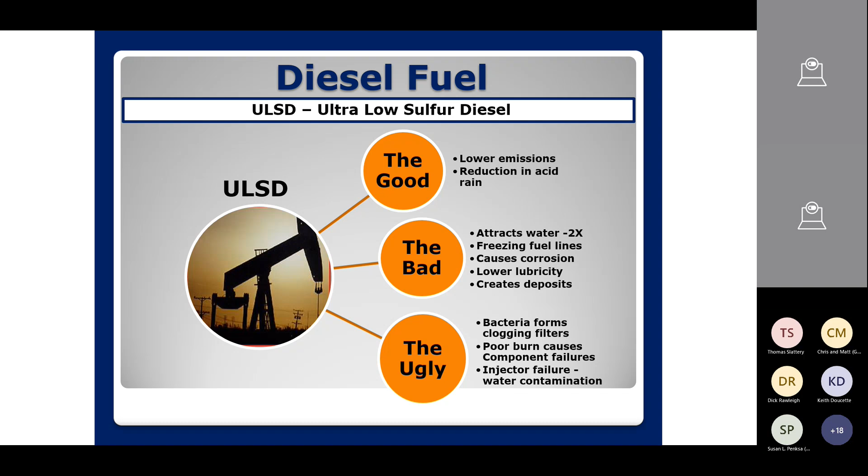So storage is a big deal. If you look at your fuel in the past, like I said, it was okay to leave a half inch of water at the bottom, and maybe you had to deal with some bacteria. But as you store fuel, and with temperature changes—especially as more and more tanks are being installed above ground—we have tremendous swings in temperature during every single day. So a 7-degree change, a rise or fall in temperature, will cause condensation.

That condensation will drip its way into the tank, and that water will fall to the bottom. But if there's standing water at the bottom, that means the dissolved water in the fuel is always at maximum level. If it wasn't, it would drink that water off the bottom. So depending on the temperature, it's always absorbing more or spitting out more to the bottom. Now the problem is when you're filling up from the fuel station or out of your yard tank, you're pumping fuel out of that tank. Well, that liquid leaving the tank has to be replaced by something—there are vent tubes in the tops of all these tanks that allow air to pump in.

So air gets sucked in along with spores, mold spores, bacteria, yard debris. There could be dust in the air, little bits of grains. Moisture certainly gets absorbed, sucked into the tank, and that causes a lot of bacteria to grow. Bacteria actually live on the layer between the water and the fuel, finds its way to water, and that's where it'll grow, and it'll continue to grow.

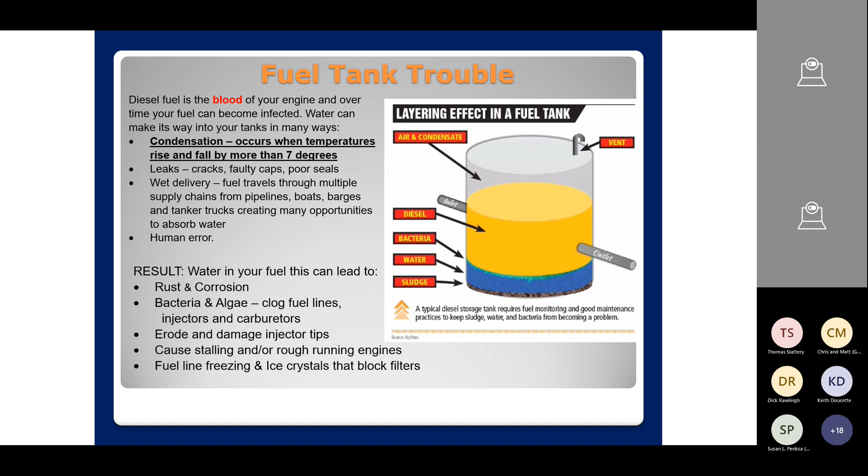And that water in the bottom can cause corrosion in the tank itself. It can cause damage in your engines, but more importantly, it's going to grow this bacteria and sludge in the bottom. So if you look at these storage tanks, at this image, what you're going to see is where the pump is, where you see the pump handle.

At the bottom, there's a little screen, and that sits 6 to 8 inches from the bottom of the tank. The idea is we don't want to suck up any standing water. But whatever's down there, as you start pumping to fill a 100-gallon fuel tank, you're going to swirl that product around, and it's going to suck it up and through. That's why filters are a must.

Now filters on a fuel tank typically are about a 10 micron to 30 micron fuel filter. That used to be okay on older engines, but now newer engines are down to 3 and 4 microns. So we're getting rid of the large debris that might be in this storage tank. And as you'll see on the left, that tall tube is the vent tube, and on the top there's just a little wire screen. That's it.

So every time you pump out of the fuel handle, you're sucking in debris that might be in the outside air. So anybody who has a storage tank that might be in just a gravel lot, we see this a lot with construction companies. Every time those trucks come roaring into that lot, they kick up a lot of dust. If someone's filling at the time, it sucks that dust right in, and we see literally gravel at the bottom of some of these tanks. Those little particles and debris particles can cause major havoc in an engine, and of course the fuel filters are designed to catch those.

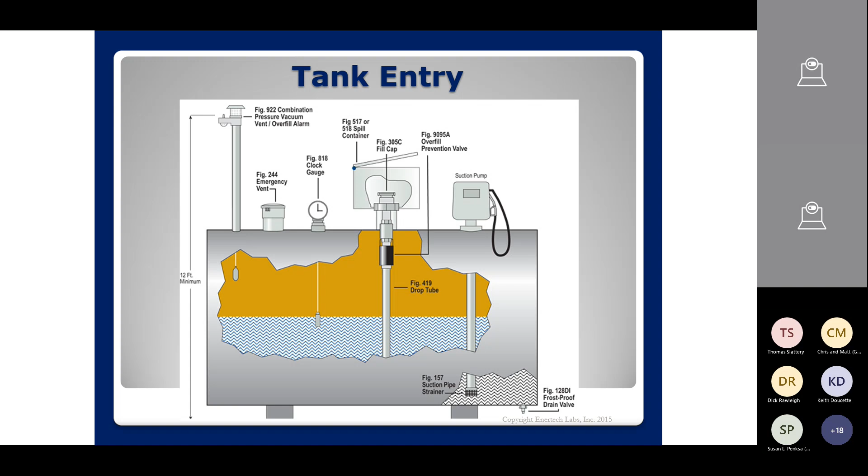It could be a leaky pipe underground. When you go to a gas station, most of the tanks are underground tanks. There's vent tubes that go along the side of the building, they go down underground and into the tank. You can get corrosion in those vent tubes and leakage into those tanks. We fix many of those. I work with a lot of companies that repair those tanks, and we break the water down to prevent damage from happening and save the fuel and restore it to good operating fuel.

So again, water's our enemy. Icing's an issue, corrosion is an issue. If there's standing water present, bacteria can grow. Without water, bacteria, their cells are filled with water. If you dry that fuel out, that bacteria will die. So it's always lurking there in the background, waiting to grow.

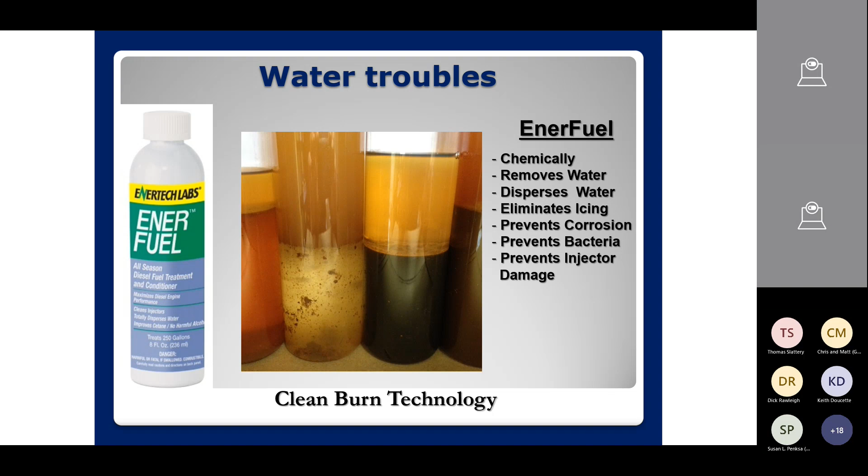All right, so that's something you really want to avoid, because those mold spores can actually get into each of your vehicles if you're filling, and they can only really be killed by a biocide or drying the fuel out, just extremely drying the fuel out.

So water's a problem. Bosch actually said that their injectors are designed to go 1 million miles, but they're only lasting 250,000. And they said dissolved water is a major, major problem. At high pressure, it's causing microscopic damage to the injectors, to the needles, to the tips. Corrosion along the valve bodies or along the inside of the injectors is a major problem.

The paragraph down there that says, it's right out of the brochure here, says the majority of engine problems stem from contaminated fuel. Corrosion problems, it's hard to read on this small screen, corrosion problems are from water contamination in the fuel caused by improper storage. And this corrosion is what's causing major problems.

So their solution was to put a $1,500 desiccant system on the intake of the vent tube that you saw in the tank, which is a great idea. The problem is that fuel comes out of the pipeline, gets stored, gets transported, stored again, finally makes it to your tank. It can already be contaminated with moisture. So we chemically break that water down to prevent the damage from happening.

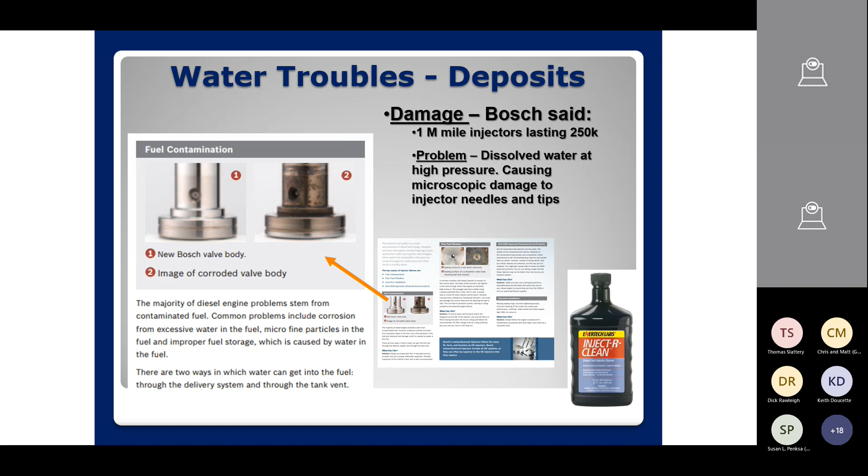And this is what we can do. We can actually take a severely contaminated fuel, treat it, and draw it back to clear and bright. And actually, in that state, no corrosion. We won't freeze anymore. It will prevent a lot of bad problems that can happen.

Let me see if I can start this video. Linda, I might not be able to actually run a video. Oh, that's a terrible thing. That's okay, I can go ahead and run that. Oh, you can? Okay. I'm muting the audio and then... Okay, there you go, it's running. All right, it's not on my end.

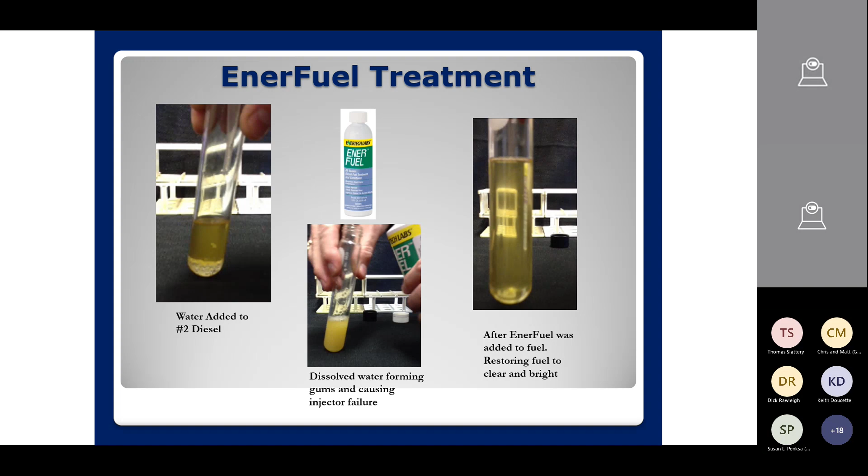But anyway, this video, what we're trying to show here is basically a video of the prior screen, which is showing that we can chemically break water down with the addition of our base product, called Enerfuel for diesel, and GasRx for gasoline. And we can return that back to clear and bright, and it's a permanent chemical change. What it does is actually create a bond between water and fuel, molecule by molecule. It's called dispersion. So fuel is hydrogen and carbon, water's hydrogen and oxygen, and it binds those hydrogen atoms together, and it allows, in this particular case with gasoline, the ethanol to stay blended in the fuel.

And with diesel, it allows that water to stay dissolved into that fuel chemically. It's small enough, chemically bound molecule by molecule, so it's not large enough to cause any damage to injectors. And, oh, is this going to work now?

Oh, it is going to work. Okay, I don't know if everyone can see this, but it's finally working here. So a few drops of water, this happens to be ethanol gasoline.

And with a shake, what you're going to see is it turns into a lemonade-looking gasoline. So what we're doing is we're bringing that gasoline to its maximum dissolved water content. And now that water will actually start to fall to the bottom. But before that happens, you'll see oils that form on this container, and that will harden. Those oils will become a gum, harden into a varnish, and cause major problems. With the addition of GasRx, you're going to see that this fuel turns back to clear and bright instantly.

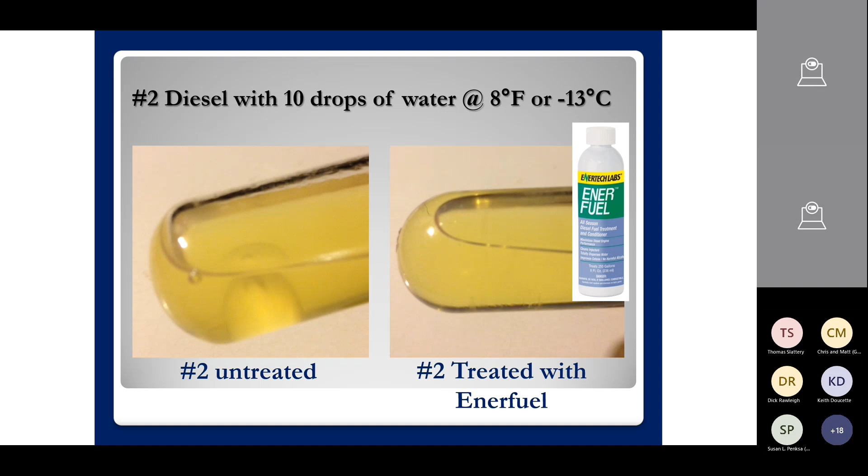So biodiesel, here's another mix. We're talking about diesel fuel that's made out of petroleum. That's basically taking a barrel of crude, boiling it down. You get 180 different chemicals out of a barrel of crude, and the mid-level distillate is going to be diesel fuel. If you keep that distillation happening more and more, you'll end up with gasoline.

Vapors come off actually before the diesel fuel. Then you end up with thicker lube oils and eventually asphalt and road tar that we make roads out of. They take that really thick stuff and crack it and reblend. They try to liquefy some of that thicker stuff and create more diesel fuel. So you'll have asphalt droplets in the fuel, and that's important to talk about because you'll end up with another contamination down the road with these high temperature, high pressure engines.

Along with all the troubles that happen with diesel fuel, biodiesel is a problem. Biodiesel is an issue because we're blending that in at 3 to 5% in most cases year round. And then even in the summertime, we get up as high as 10 and 11%. In Illinois, it's mandated to be 11%. There's a little less BTUs in that fuel, so over-the-road guys that fill up in Illinois will lose about half a mile per gallon on a 7 or 8 mile per gallon vehicle.

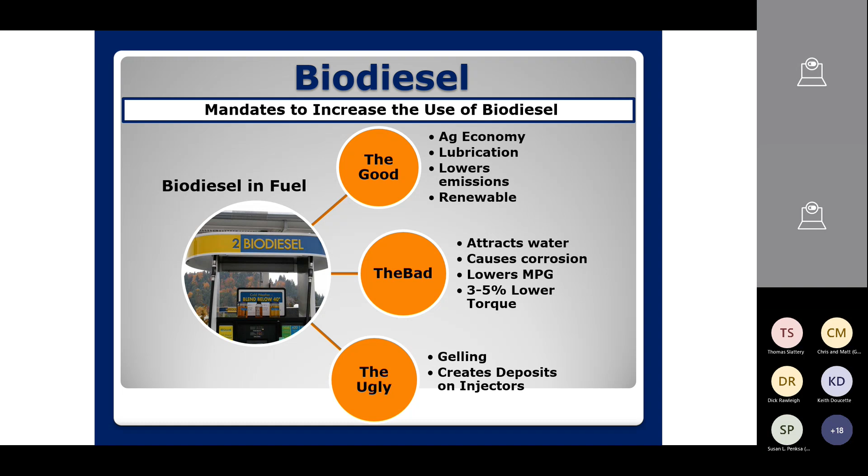Certain people like biodiesel, others don't. When you're out there in the world of plowing snow in the wintertime, it can be a nightmare for you. If the temperature drops and you have some biodiesel, it can cause some major problems. I've seen chicken fat, beef tallow, pork fat - those are the worst. Getting into different types of soy and different types of biodiesel, it can really be passed through without much of a problem. The soybean oils are some of the best.

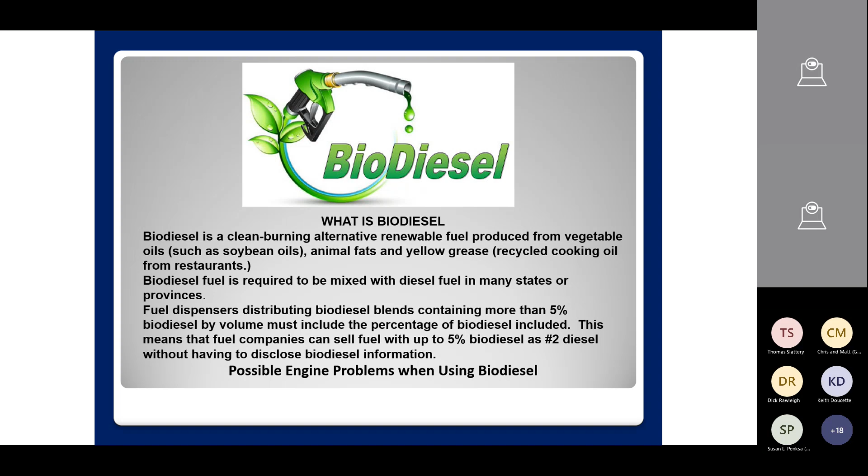Engine problems can form when using biodiesel - something called metal carboxylates or carboxylic acids. Some of the storage situations that the fuel is in, combination with those fatty acid methyl esters or monoacids, can cause a sort of oxidation layer or corrosion. It can corrode iron surfaces. It can also cause a carboxylic salt layer.

So what that means for you and your engines is that this layer can build up on the inside of the injectors and in the fuel systems and restrict fuel flow. It can also cause a sticking point for the injectors. So some of these needles can stick, preventing the engine from running properly, causing some problems with runnability, starting, hard starting, rough running - major problems with those engines.

So it's important to know that these things can be avoided by using the right injector cleaners, by watching to make sure, if at all possible, not to use biodiesel in your fuel systems, or make sure you know that you need to do something to prevent further issues.

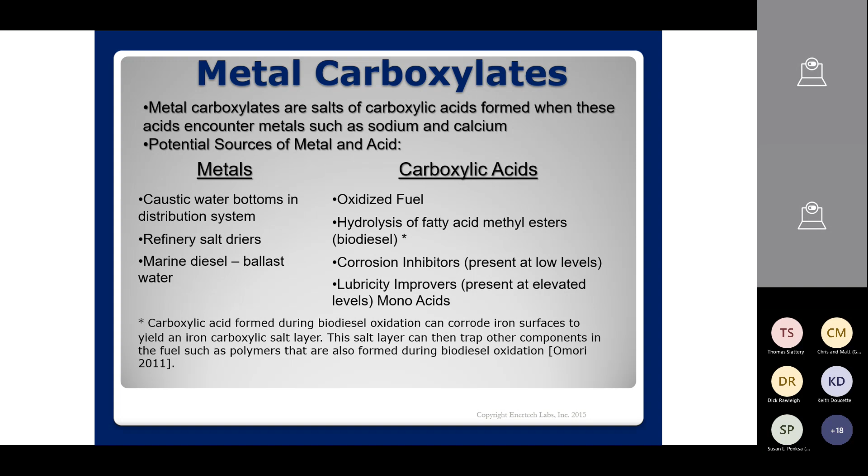If you picture fuel as a basketball-sized drop, the outside layer starts burning, it has to burn toward the middle - that takes a period of time. If you had that basketball-sized droplet of fuel at very high pressure, maybe it turns into 100 marbles. Well, that same volume of fuel now has a lot more surface area, and a smaller time is needed to burn that fuel completely. That allows for a cleaner burning engine.

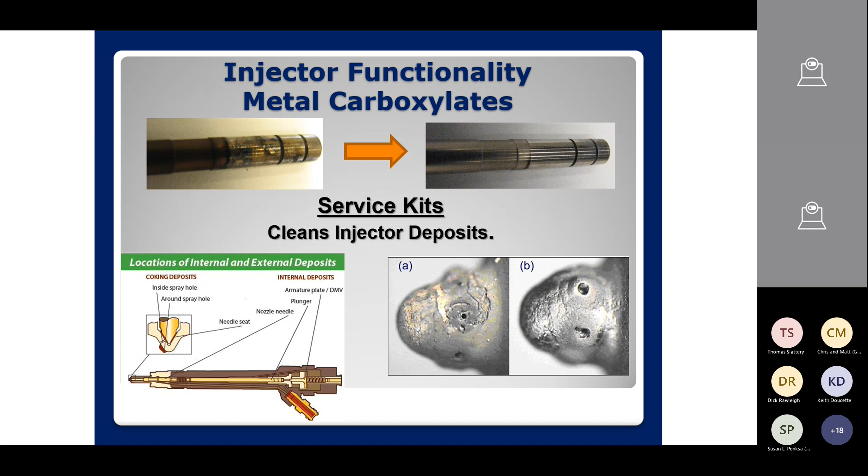Any unburned fuel is the black soot that you see coming out of the exhaust of an old truck. Well, you don't see that soot anymore. That soot's still there - it's just getting caught in the diesel particulate filter, the DPF.

So you'll see here, this is another injector. This is a HEUI style injector from a 6-liter diesel. You'll see that red fuel flows through the inside and around the needle at the bottom and out the tip. What it does is the injection happens from high pressure engine oil.

It hits that plunger and pushes fuel out at 21,000 psi. It actually overcomes the pressure of the spring that's holding that needle all the way down to seal that tip. In that image to your right, you'll see the needle is actually seated right in that tip down there. So as the pressure builds up, it pushes that needle up, allowing fuel to squirt out of the nozzle holes. And those holes are very, very small.

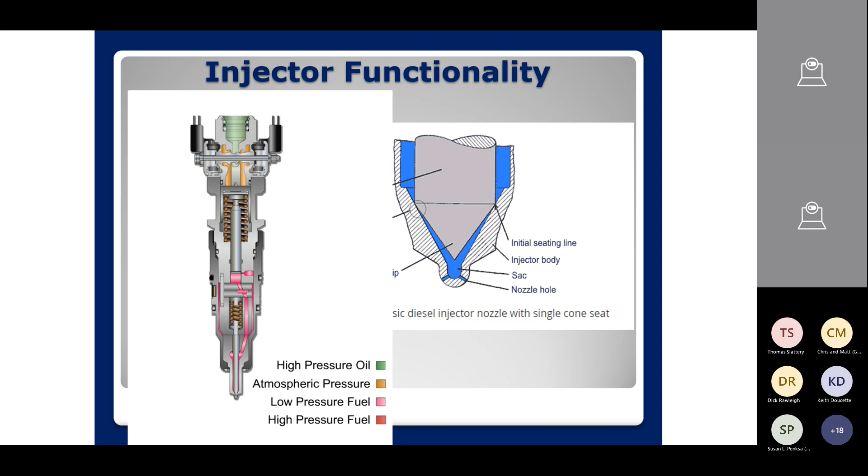So any debris that gets into that situation can really cause some damage. Now picture that at 20 to 30, 35,000 psi. If a droplet of water gets in there, the droplet of water is larger than fuel droplets. It doesn't fit through that little nozzle hole too easily, and it can start to distort that tip, bend or blow that tip. So water is our enemy. No matter if you believe in our hocus pocus or the fuel additives that we sell, please understand, no water is allowed in a fuel system anymore. It's dangerous and damaging to these engines and shortens their life dramatically.

Now think about what happens. What we used to do, like in the previous slide, is take low pressure fuel and hammer it really hard to increase pressure to get it to inject. So right at the tip, we had just 40 pounds of fuel pressure, and then we compressed it very rapidly in a short period of time to get up to that high 20,000 psi.

In newer engines right now, piezoelectric injectors, instead of using a mechanical hammer to inject that fuel once, we're using high pressure fuel, and we're actually able to buzz fuel in, literally a number of times per piston stroke. But what engine manufacturers had to do is have that high pressure fuel available.

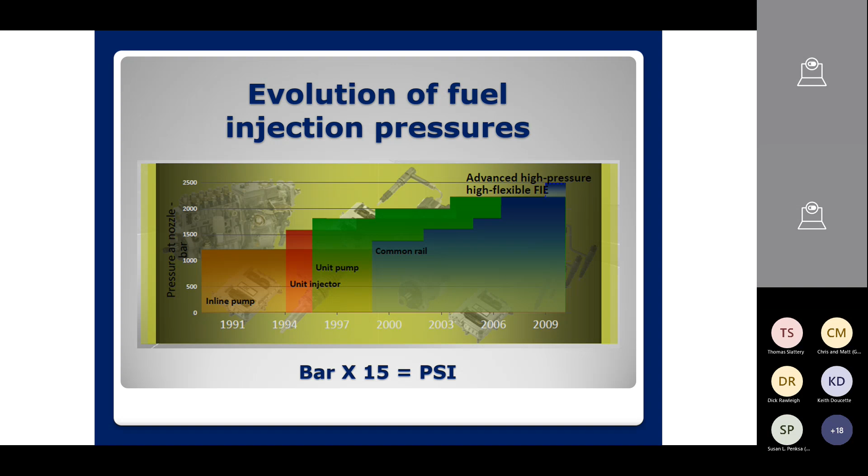So now in these systems we actually have fuel rails that are at that 30 or 40,000 psi. In order to get it pumped up that high, you may take fuel from the tank and go through a number of pump and compression stages to get it up to the fuel rail, the common rail. That common rail is sitting at very high temperatures and very high pressures. By the time it gets injected out of the tip, you can have up to 300 to 600 Fahrenheit. It's a tremendous temperature, and at that tremendous temperature, you can actually cook the fuel.

Now, remember earlier I said fuel is hydrogen and carbon. We can cook that fuel and create something called carbonaceous deposits, where that fuel can actually start to break apart the hydrogen and carbon atoms. That can also cause polymerization of anything in that fuel that might be like asphaltenes. There's little asphalt molecules that are in there, microscopic, in all fuel, used as energy, and they burn. But with high temperatures, they start to get sticky. They polymerize and start to stick to each other.

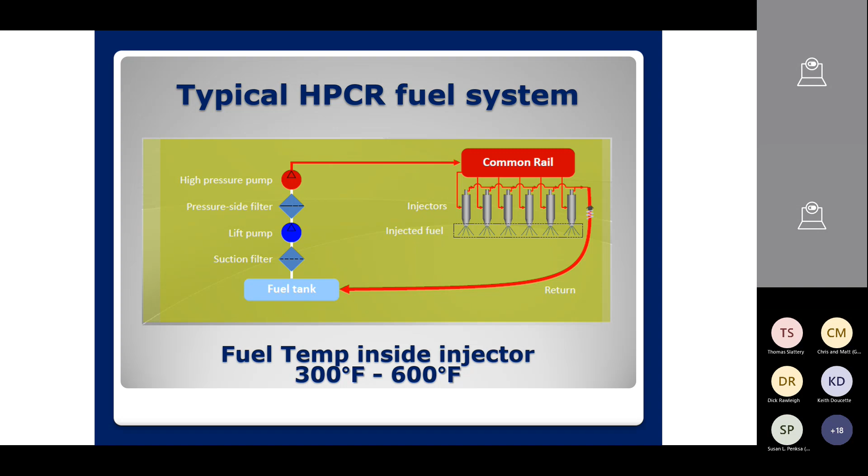You can start clogging those fuel filters and actually make it look black, like an oil filter. You might not even be able to get on some engines back to the normal fuel filter changes. If you have a Davco filter, a glass bowl filter on a semi, you'll actually see the fuel levels rise and those filters look black. And if you look at the fuel, it might look good and yellow, might look like decent diesel fuel, and you wonder, where's the black coming from? Well, it's these microscopic carbon deposits that are happening.

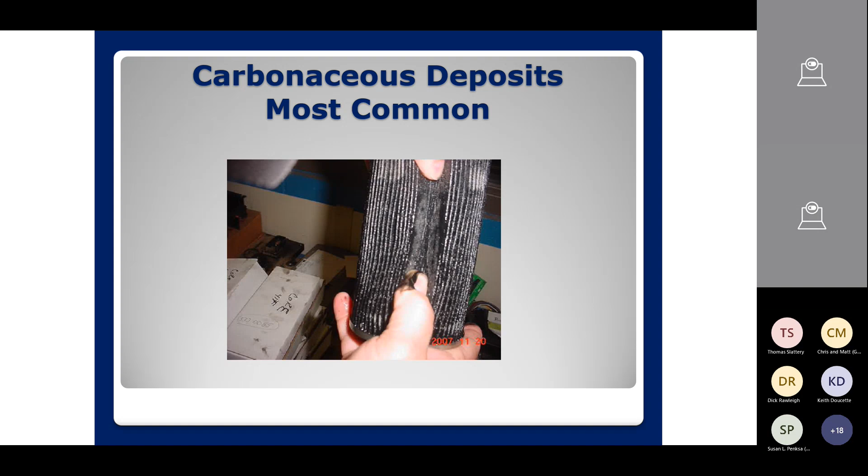In this situation, you might rub your finger on and get some of that black stuff like you see in this diagram, and it might feel kind of gritty or hard. That's carbonaceous deposits from high temperature. You need thermal stabilizers to keep the polymerization from happening, and injector cleaners to keep it from happening as well. If it feels oily or slippery or slimy, it might be asphaltene dropout. And think about that.

That's like a heavy oil, like an asphalt or lube oil, and that's also another thing that has to be thermally stabilized. Remember, all these little problems you see in an engine - rough running, hard starting, deposits in injectors, water contamination, corrosion, bacteria problems, carbonaceous deposits, asphaltene dropout - all of this is happening on the base stock of your fuel.

You don't know where that fuel's coming from. You don't know if it's got biodiesel in it, how much asphalt it has from the refinery, where that raw material came from - sweet crude from overseas, sweet crude from the Bakken Formation in Montana. Sometimes we're getting crude out of the middle part of the U.S., which happens to be decent crude, depending on the cost of a barrel.

When it gets up to $120, $130, $140 a barrel, we're getting product out of the tar sands up in Canada that gets sent down to our refineries. That's a very difficult thing to refine. The higher the paraffin wax content, the higher the gelling that happens.

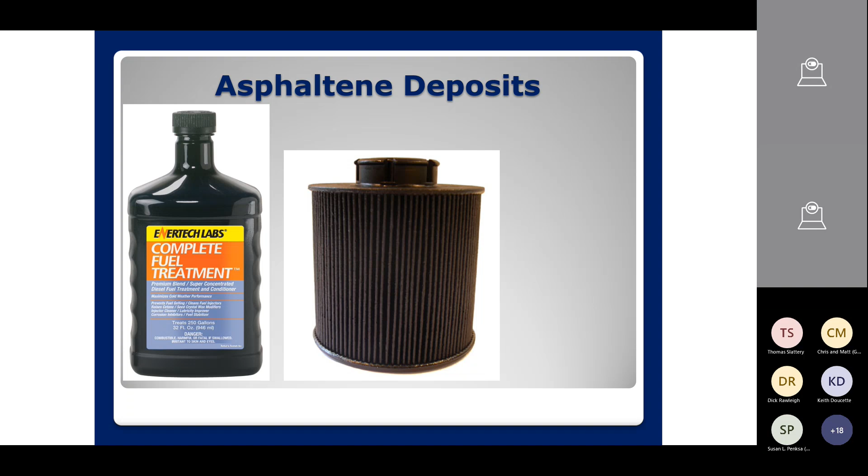There's a lot that goes into fuel. People just think, well, it's fuel, diesel fuel's diesel fuel, what am I worried about, I don't have to worry about anything. It's not true. Depending on the quality of that fuel - we haven't even talked about the basics of fuel.

Which is how much lubricant is in there. There's lubricity that's needed, and as we've refined out the sulfur, a side effect of refining to ultra low sulfur diesel fuel is removing lubricity. How much cetane's in that crude? Cetane's a measure of the combustion of that fuel.

What about the injector cleaners? What about water concentration from the refinery? What about the amount of paraffin wax? We're going to still talk about that kind of stuff. But how this fuel all comes together as a composition depends on how it acts up in your engine, on how well it burns.

And it used to not be a big deal - a diesel engine could burn anything. The older engines at very low injection pressures, you could pour anything you want into it. You want to clean out your injectors, toss a little tranny fluid in there. Not anymore - you'll damage your engine.

People used to put used engine oil in to lubricate. You can't do that. Maybe if it's a 50-year-old tractor, but not on a new engine.

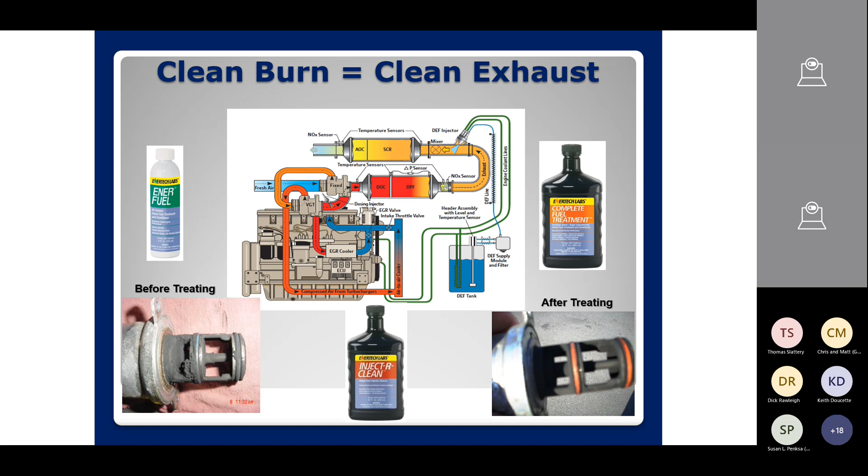We have customers that treat with our products that don't have these nightmare problems because we get the fuel, we remove the water, we have injector cleaners, lubricity agents, cetane improvers, and products that help the fuel to burn more efficiently. These coking problems - anything - when you run a diesel engine, if it's an idling engine, it's a cold running engine. If you run that engine hot, it wants to be run hot, run hard.

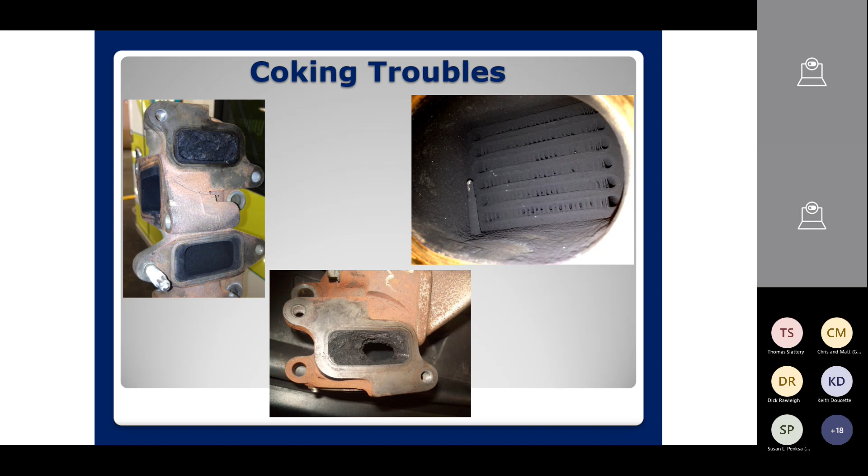Just cruising down a highway is not running that engine hard. If you're hauling heavy, fine, if not, shut that motor off. If it's idling, it's going to clog these components horribly.

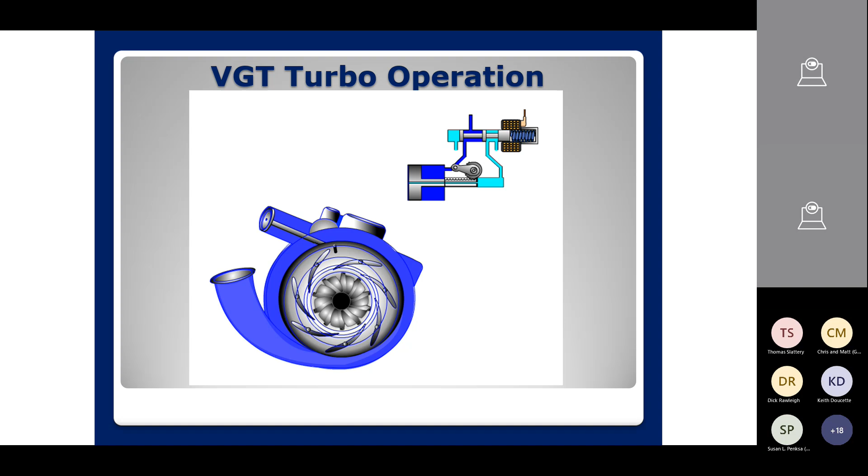VGT turbos - you'll see these little fins in there. They open and close to change the amount of air pressure needed to keep that engine running properly. These things get clogged horribly, and it locks these blades up and doesn't allow them to move back and forth. We have injector cleaners in our product that, when the fuel burns, turns into a hot vapor that will help to liquefy and clean out some of these issues.

Sometimes they're too far gone with corrosion, rust, and deposits that are hard as a rock. But the deposits are literally in the exhaust, unburned fuel. See, when the piston stroke runs and you fire, that fuel squirts in, that compression engine burns. Any moisture that's in that fuel will turn to steamy vapor.

When it goes through an EGR cooler, it drops 600 to 700 to 800 degrees. When it drops, that water vapor will start to get sticky again. It will mix with that unburned fuel and cause a sticky mess that starts to line the inside of these components, sticking to all the EGR coolers, EGR valves, intake manifolds, and VGT turbos.

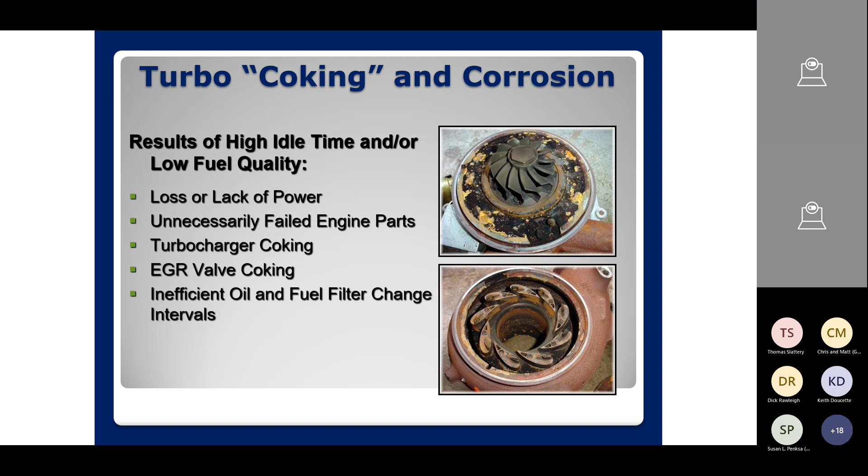The DPF collects all the soot. This is like having, I describe it as, a wire garbage can next to your desk. You can fill it with globs of wrinkled up paper, but you clog it with paper, and if you try to blow air through that wire mesh, it's going to be restricted by the paper. Well, that's what happens in these traps. It fills with unburned fuel. Now we got to burn the fuel to get rid of the soot or get rid of the blockage. Same thing with the paper. If you light it on fire, you'll end up with a quarter inch of ash at the bottom, and you can fill it with paper again. Well, that's what happens in an active regen.

We squirt fuel down the exhaust line, wasting fuel economy to flame throw this diesel oxidation catalyst at 400 to 600 degrees going in, turns into 1400 degrees coming out, and burns off all that soot, freeing that trap to get more soot to add in.

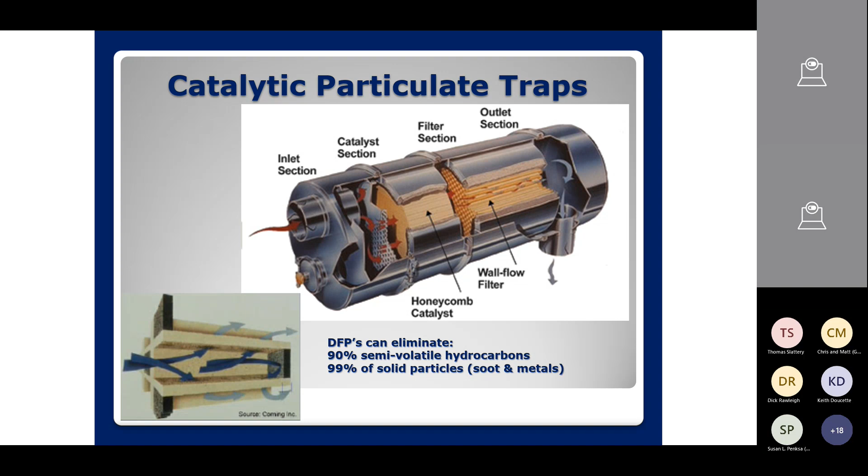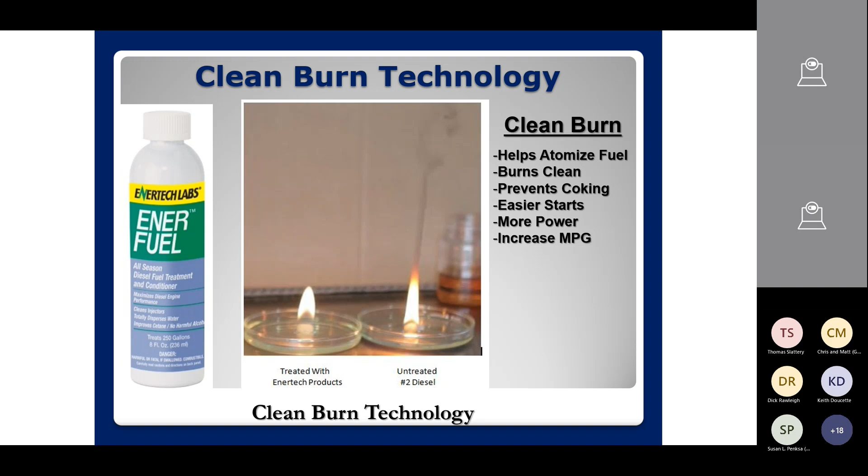We think you should reduce that by getting the fuel to burn more efficiently. So we do that. We actually change the fuel composition a little bit with surfactants and allow the fuel to atomize chemically as well as mechanically, and allow that fuel to burn more efficiently.

Melinda, if you could fire up this video, I'd appreciate it. So I think what's happening with the videos is that if people play them independently they work, but they're not broadcasting. That's the feedback I got from somebody else on the call. We did something earlier where you got it to play, and then I could press the play button and it would work. Because right now it's not working for me on my end. Okay, so try to play it on your end. Maybe it'll trigger something. It is playing on my end.

Okay, well if everybody could try playing this video, I just know the timing, it's about a minute. Basically, each of these dishes has diesel fuel, the same diesel fuel in it. We use a cotton ball as a wick. The first dish we use Power Service. The second dish we pour in a little bit of Lucas Oil. The third dish is our base product called Enerfuel. And the fourth dish is just the straight number 2 diesel. What you'll see is everything has soot coming off of it except the one that added Enerfuel.

You'll see blue is a high temperature flame and orange is a low temperature flame. So we have a blue hot flame. We're helping that fuel to burn more efficiently. We're helping you to squeeze all the horsepower you can out of that fuel, all the BTUs, get the most power out of your engine and not clog those components. So it helps atomize the fuel, burns clean, gives you more power, prevents coking and clogging, easier starts, better fuel economy, more horsepower.

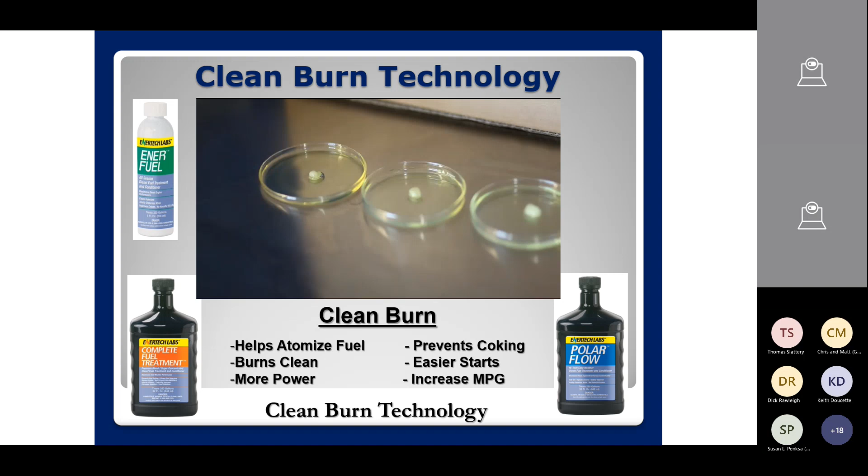Oh, there we go. All right, so this injector that you'll see—real quick, we have products. This is an oil-fired or HEUI style injector, hydraulically actuated injector. They use dirty engine oil to fire the injector. Well, that can create its own deposits. So we have an oil flush that's detergent based, not solvent based, that really helps to clean that side of the engine out and keep that injector firing the way it should.

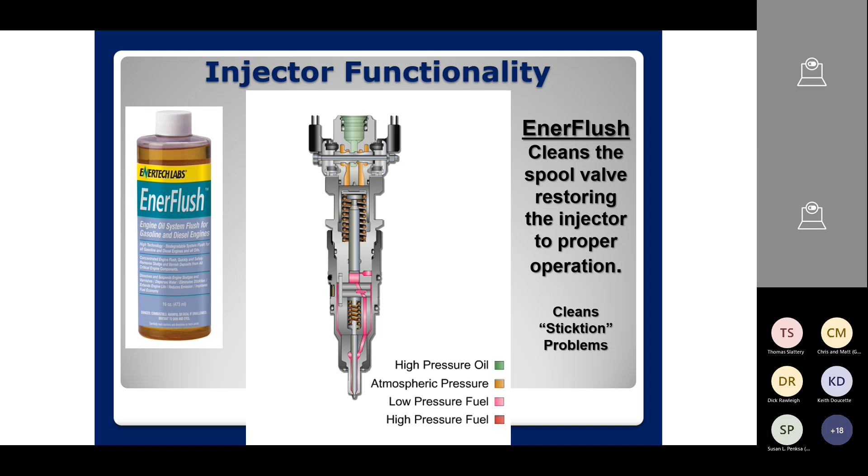All right. Now, what everybody's used to hearing when it comes to diesel is cold weather. All of the things we've discussed so far have nothing to do with how cold it is outside. Now, except for ice, I guess. Now we have paraffin wax that thickens in the fuel. That paraffin wax is just candle wax. It's literally can become hardened candle wax.

That liquefied microscopic wax crystals that are in there burn and create tremendous horsepower and BTUs. That's why we use diesel to haul super heavy things and not gasoline. Gasoline doesn't have any of that paraffin wax in it. So now what happens to paraffin wax when it gets cold? Those wax crystals start to form and grow and stick to each other, and they start to get big enough so you could see them in the fuel like a hazy wave through the fuel. Your fuel will start to look a little cloudy. So that's the cloud point. It'll still pass through your filters.

It'll still run your engine. You don't have any problems. But that cloud point is an indicator that just a few more degrees colder and a little more time spent, you're going to hit a problem called the cold filter plug point. And that's exactly the number that if you buy your own fuel from fuel suppliers, you should ask them, what's my cold filter plug point today?

Right now, I just got a sample of fuel coming out of a fuel station in Buffalo, and that sample was sent this week. The cold filter plug point of that base fuel was 0 degrees. Now, June or July, it's plus 5 to plus 10. The last time I did that in June, it was plus 8 degrees. So coming out of the rack, which means coming out of the pipeline, it's at 0 from the refinery today.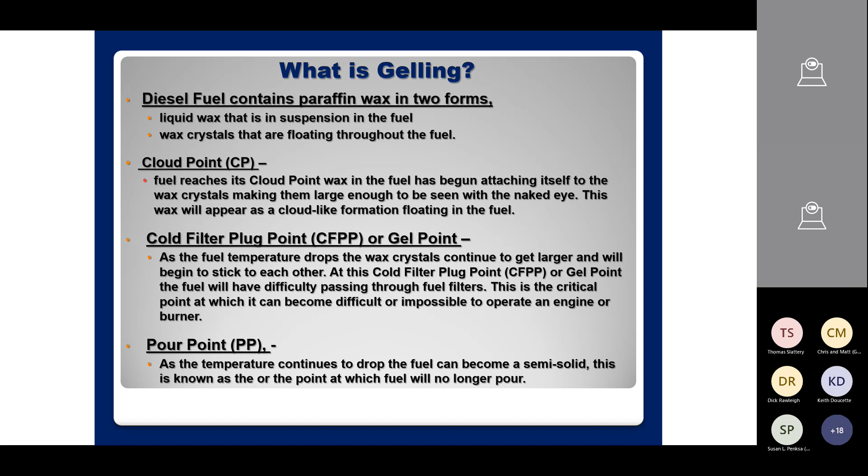Pour point is where, and the only people concerned about pour point are the fuel delivery company. You can't pour it out of a container, you can't pump it through a hose. You guys don't really care about that stuff. What you care about is cold filter plug point. What is that number? That's basically what we use cold flow improvers for.

So in an additive, if you ask your fuel supplier, how are you treating my winter blend? Everybody calls it a winter blend, and you're paying more per gallon for a winter blend. Well, what is it? Is it a cold flow improver, or are you selling me kerosene? Cold flow improvers coat the outside of these microscopic wax crystals.

And even as you look at how we've refined this fuel, low sulfur fuel had little tiny jagged crystals that don't look like they'd really stack or stick together. Ultra low sulfur, microscopically, look at that - they look like building blocks with nice flat edges that can really stick together nicely and create a big problem called wax dropout, which is when they stick together, fall to the bottom, and jam filters. So this is a problem for ultra low sulfur diesel fuel.

So what happens with cold flow improvers is they coat the outside of those wax crystals before they start sticking together. It is a preventative. So if you're already gelled up, it doesn't matter how much additive you add as a preventative, as a cold flow improver - all you're doing is taking that one big giant wax crystal and coating it so it doesn't stick to another giant wax crystal.

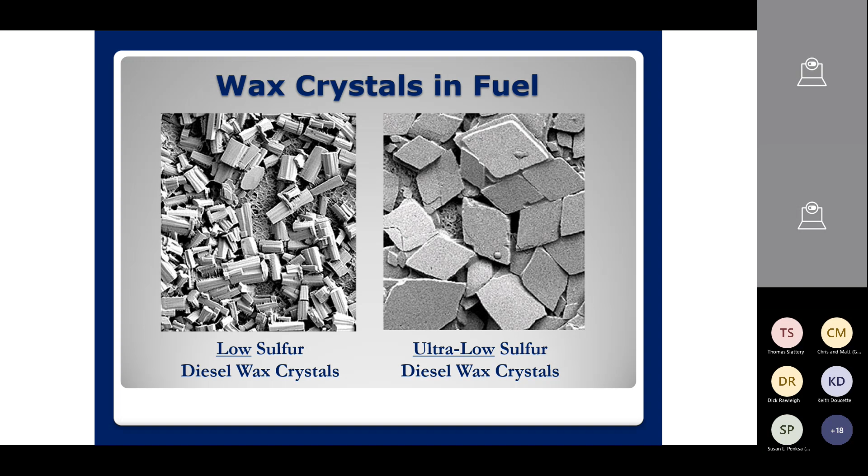If it's gelled up, you have a big ball of goo at the bottom, you're just going to coat that one big ball of goo. You need solvents to liquefy this. Solvents will liquefy these wax crystals, allow them to blend back up into the fuel again and burn. That's the way, or you bring it into a very warm area and allow it to sit for a period of time for those wax crystals to melt again.

The other thing we do is blend with kerosene. Kerosene is just diesel fuel without the paraffin wax in it. So you lose fuel economy dramatically - you'll lose a tremendous amount of fuel economy using straight kero. In the refining process, they remove a lot of the lubricity and a lot of the cetane. So this is a problem. Instead, you pay about 20 cents more a gallon for it.

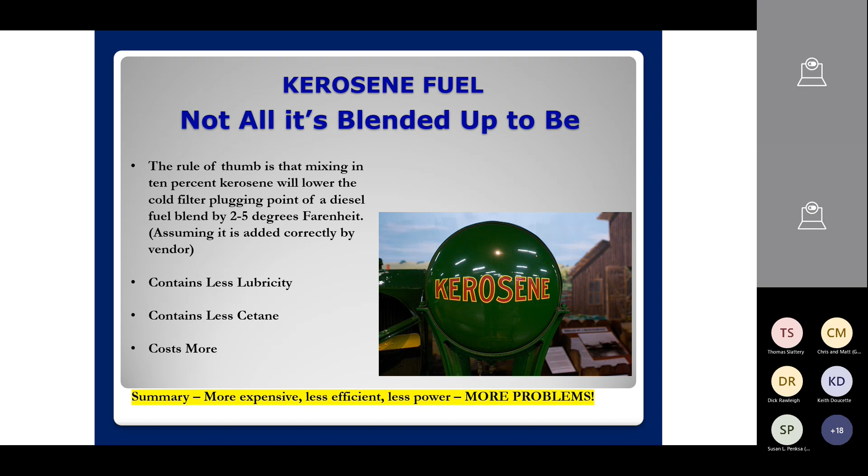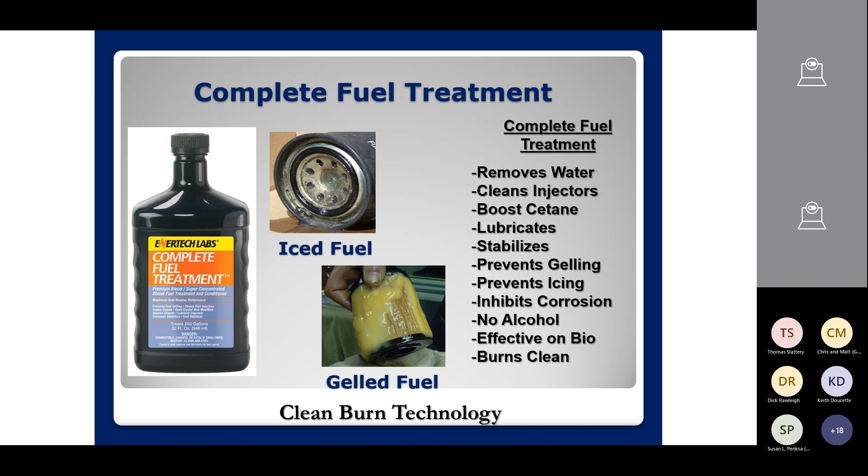So we would recommend that you treat with a fuel additive to coat the wax crystals, to boost cetane, to boost lubricity, to boost cleanliness, and get the fuel to burn more efficiently. And we can do that at 3 to 4 cents a treated gallon.

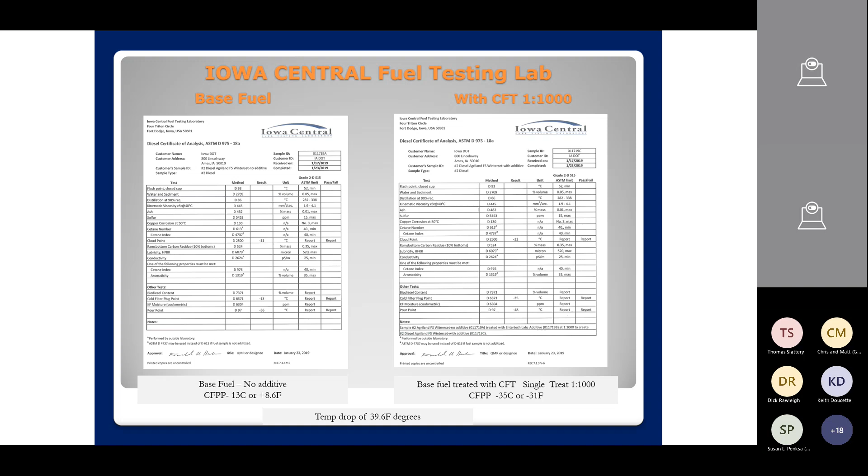This was a base fuel treated last year in Iowa. The base fuel gelled at plus 8.6 degrees, and with one treatment, a complete fuel treatment, a gallon per 1,000, it dropped 39.6 degrees to minus 31 Fahrenheit of protection. We haven't been at minus 31 in Buffalo ever. So that's a big deal.

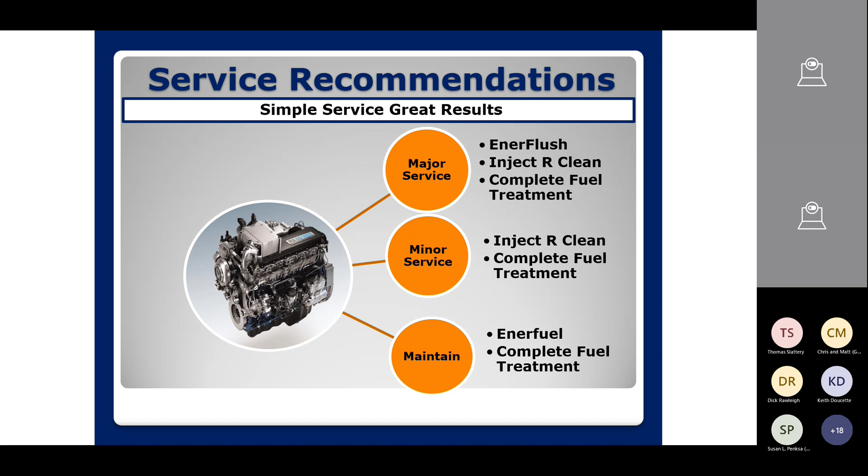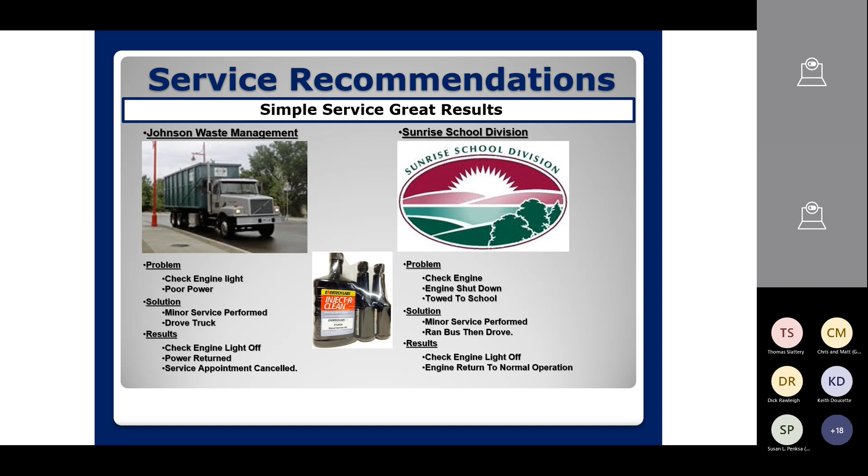We increase fuel economy. We have testimonials enough to pay for the fuel products, the fuel additives. We have service kits that allow us to - I'm skipping along a little bit - the service kits are great. If you think you need injectors, get one of these very inexpensive service kits. You're filling the fuel filter housing with injector cleaner, run the motor outside for about 40 minutes at a high idle. It'll clean those injectors and light them up. If not, then replace injectors.

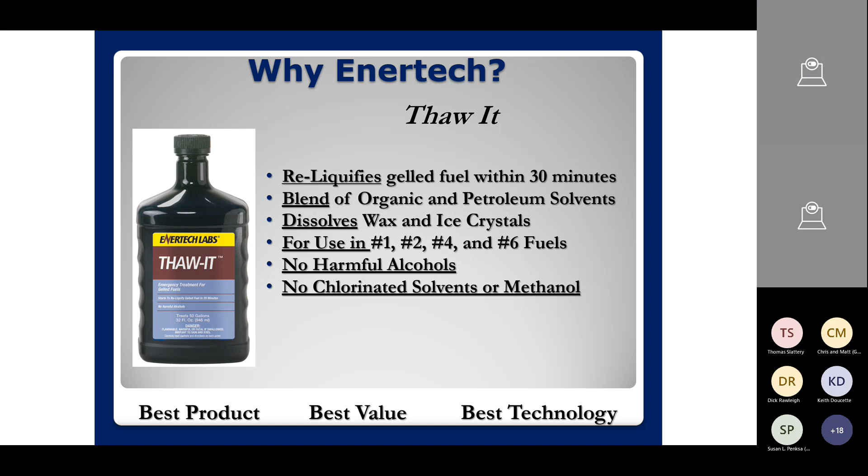Thaw It is a product that will liquefy the diesel fuel and get you back up and running. So that's the diesel. We do not affect SCR systems, which break down NOx. We could go into that in a separate seminar if you need to.

So that's diesel. We recommend that you treat your diesel, take care of it, watch your fuel tanks, make sure you treat your engines properly, and they'll treat you properly for years and years and years. We have fleets that treat with our products and never pulled a DPF off ever. In 200,000 miles, 12-year-old school buses never have a problem.

On a quick note, we only have a few minutes left. I'm going to jump into gasoline. Gasoline used to have something in it called MTBE, methyl tertiary butyl ether. That product, when you burn it, releases oxygen into the exhaust line. Well, that causes cancer in humans and causes a lot of problems for us.

So in comes ethanol. Ethanol's been around as a fuel for a long time. It's basically corn, it's liquor, right? We refine this and make this ethanol, and we mix it into our gasoline at 10% because burning it at 10% releases oxygen for the O2 sensors to tell the fuel control module how much fuel to inject. So on EFI'd engines, this is a real benefit, but of course it absorbs a tremendous amount of water.

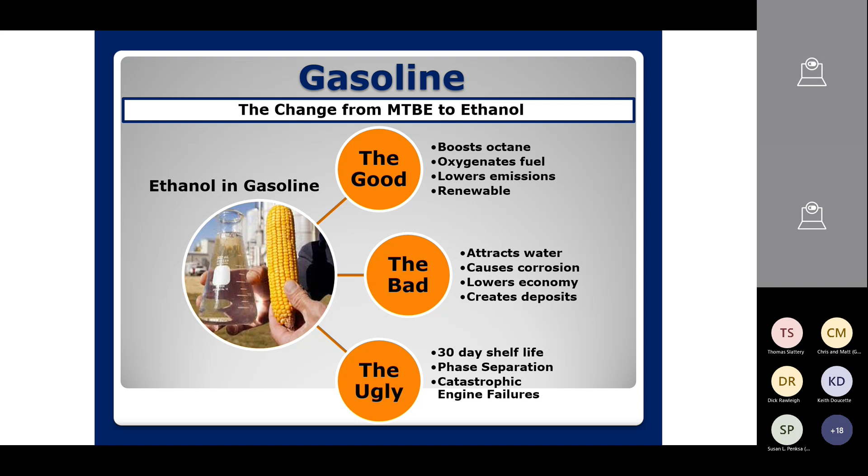Alcohols love water. It'll hold 5 gallons per 1,000, which causes horrible problems with corrosion. That corrosion can cause deposits, oil contamination. It can get to a problem called phase separation.

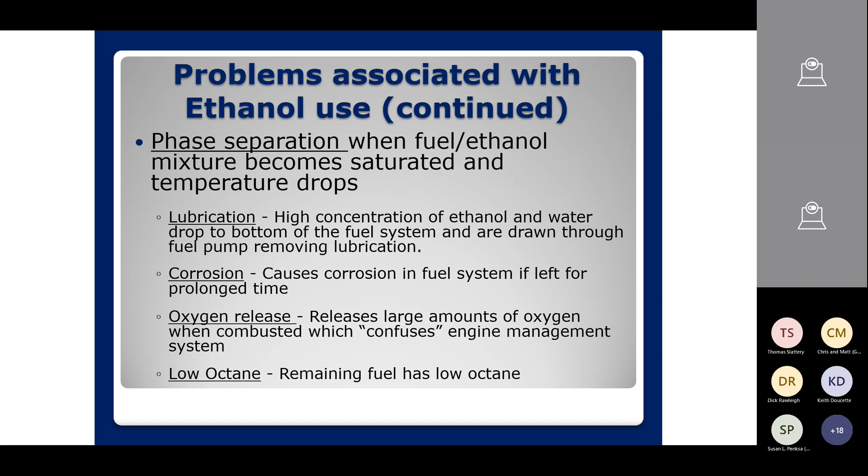I'm going to skip along here for a minute. Phase separation causes a tremendous issue where if you get to the point of saturation, which is that 5 gallons per 1,000, that water will fall to the bottom and it pulls all the ethanol out with it. So now back in that O2 sensor EFI'd engine, if you burn the fuel that's only at 4 or 5% ethanol because all of it fell out with the water, you have a huge problem of running rich and it leans your motor out, right?

So if you burn the high ethanol content water at the bottom, well, now you have a huge burst of oxygen and the engine wants to flood the motor, which can melt the catalytic converter. We've had tremendous corrosion issues, fuel lines get eaten, intake manifolds can blow up from a flooding issue. EGR valves are an issue, deposits are a problem.

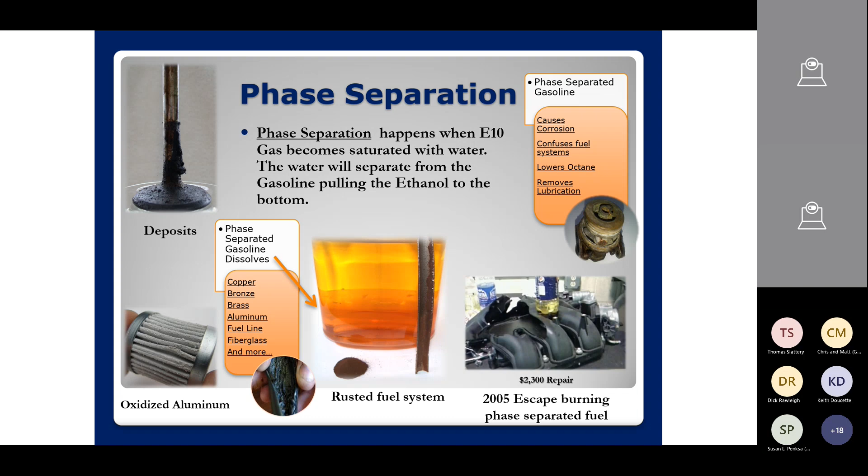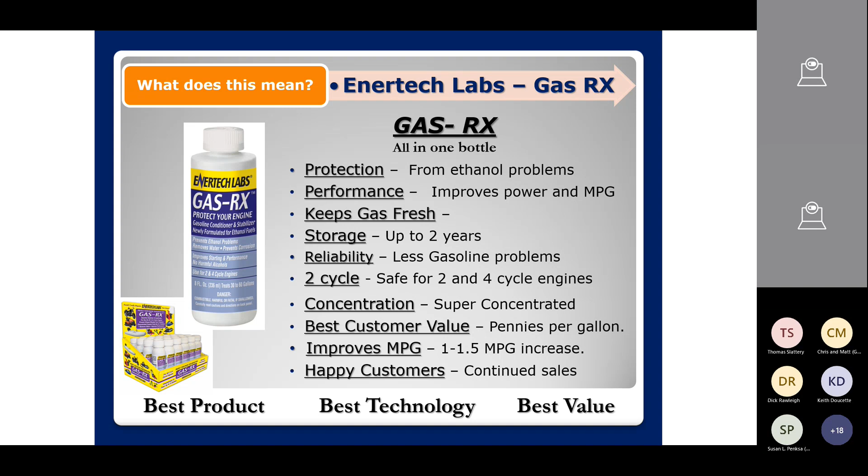So again, breaking water down, we've reversed this problem. We've saved gas stations tremendous tens of thousands, hundreds of thousands of dollars by a simple treatment of our product called GasRx. So we're preventing water, corrosion, deposits, failures, runnability, and we increase storage. GasRx will keep stored fuel fresh for up to 2 years, and it does everything that a Startron, Stabil, and Seafoam will ever do. But what we do above those is prevent the water problem in the first place.

So thank you very much. I know I was running as fast as I could. Hopefully this was a benefit to you guys to hear a little bit about fuel and why it's a problem. Please keep your fuel dry, keep it treated, read the labels and understand what your fuel additives are really doing for you, and treat. Your engines are just dying at a premature age because of all the problems that we have from poor fuel.